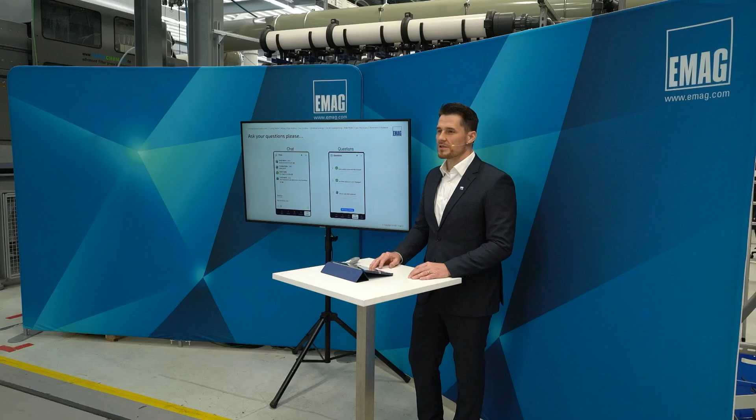You can see it, you can maybe also hear it. We are not sending out of the studio today, but we are sending from the EMAG Heubach plant. We are located about 60 kilometers east of Stuttgart and half an hour in the car from EMAG headquarters in Salach. Here in Heubach, we are the technology company within the EMAG group for ECM, meaning electrochemical machining, and what we will be talking about today, laser technologies, meaning EMAG LaserTec.

Today we will be talking about the following. First of all, we'll be giving an overview of the EMAG LaserTec machine portfolio and look in detail at the ELC6 machine. Then, since we are here live in the plant, we will talk about the newly designed setup of the Laser Application Center here and also give a live tour. And here we will also see some of the machines out of the machine portfolio in action.

When we then come back to the presentation, I will try to close the circle to show how we use the machines and the technologies, which we also see in the center, to produce and deliver full turnkey systems for our customers. The last topic will then be the laser hardening technology with the example of our ELC 1300 LH machine.

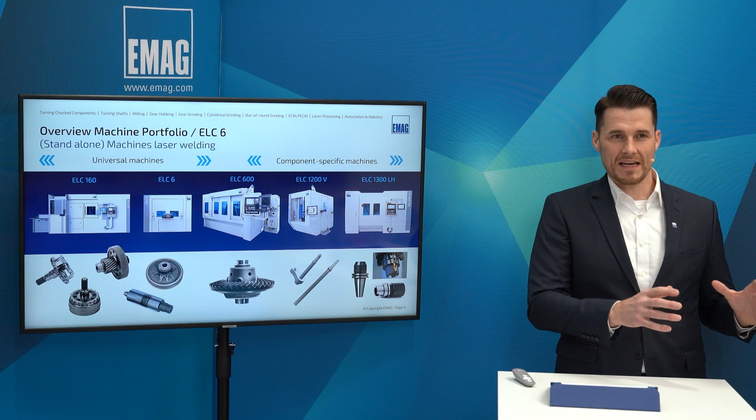The ELC 160. This is our most common machine. Almost 200 of these machines are producing parts around the globe. It was designed for a welding diameter of about 160 millimeters, but over the years that was more and more expanded. However, the name was established and stayed on. The machine is a linear design. There's a working spindle with a clamping device coming from the bottom, and that is moving through the stations linearly.

In 2018, we introduced the ELC6 to the market. The main difference, this machine is not a linear design, but it has a dial table for loading and unloading. That means, of course, that the load-unload can be done in parallel to the production time, and the cycle time will in that way be shorter. Now, this machine has, in the short time since it's been on the market, already become our most important machine, and this is why we will look at the machine in detail later. These two machines are used typically for passenger car powertrain components.

Now, the ELC 600 machine is right between universal and specific. The reason for this is it's a bigger machine, so the components are more or less out of the commercial vehicle powertrain spectrum. The machine itself is very flexible, so if the application is right, we can use this machine, of course, outside of these workpieces. But for now, it has mostly been used for truck differentials.

The ELC 1200V machine is also a dial table machine. We'll also see it in the Laser Application Center in a minute. This machine is also quite flexible. However, the main application so far has been welding of aluminum tubes to fittings, for example, in air conditioning of passenger cars.

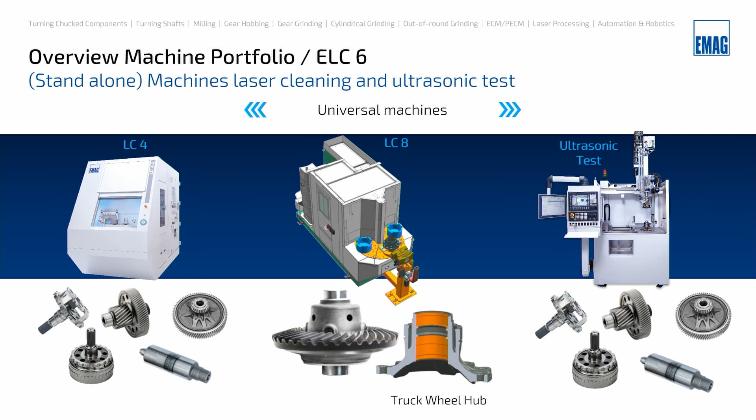Now, the LC4 by its size is, let's say, perfect for passenger car powertrain workpieces. The LC8 again is a bit bigger. This one will then be mostly used for commercial vehicle powertrain parts. And then we come to the ultrasonic test machine. This is then again for passenger car powertrain workpieces.

Now, this was a machine overview, and now we'll be looking in detail at the ELC6 machine. Again, the ELC6 machine has quickly developed to be our most important machine. We see here the two views. One is from the operator side, the other one is from the loading side. This version is in most cases used for automated loading, but it can also be delivered as a standalone version for manual loading, as shown here, then with a partial safety fence and a light curtain.

This is the machine design, the view now open from the operator side. So position 1, the loading area, is not visible. That's behind on the other side. But position 2, the swivel table, the dial table, brings the workpiece from the loading area into the weld station. Position 3 is then the working spindle coming from the bottom that clamps and locates the part and then brings it up to position 4, which is the counterbearing. The counterbearing holds the upper weld tooling. And the spindle, position 3, from the bottom brings the axial force into the workpiece.

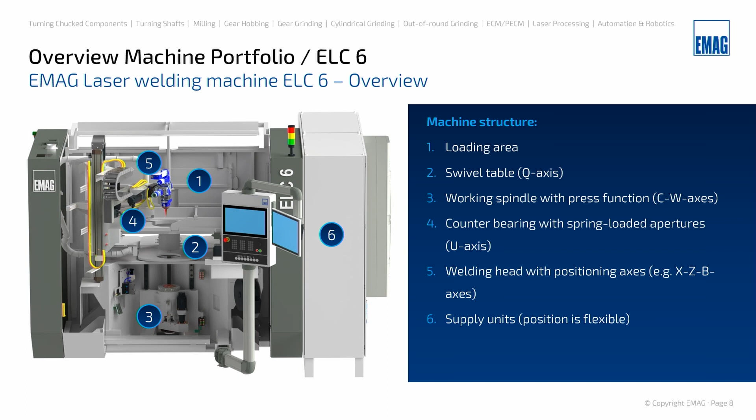Number 5 is the welding head. The welding head has certain positioning axes. For example, a horizontal, a vertical, and a swivel axis can be integrated, and that is what gives the machine its flexibility. Position 6 is then the supply units, for example, the electrical cabinet. The position of this is, of course, flexible wherever it is needed in the plant.

Yeah, the machine is fast, loading and unloading in parallel. It's flexible, different weld toolings can be installed, and the weld head is again mounted on different positioning axes. It is precise because in this machine, like in all our ELC machines, we use our own customized clamping devices. These are completely designed, manufactured, and assembled here in Heubach as well. So this is truly an EMAG product.

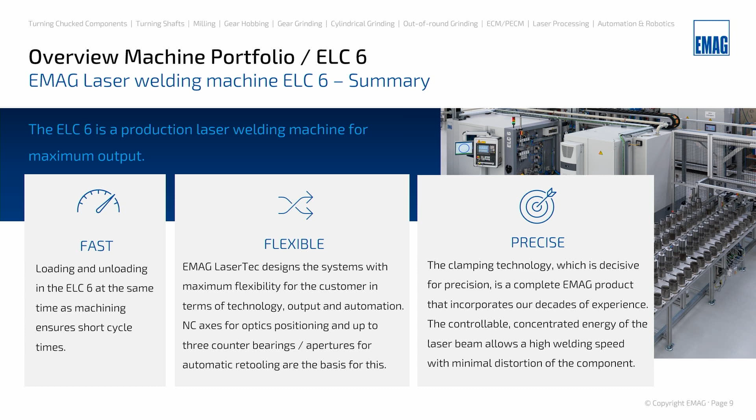The process safety comes from measures such as the active control of the welding position, or for example the use of state-of-the-art process monitoring systems like an LWM, a laser welding monitor. The machine also brings economical advantages. Why? Laser is of course a very efficient tool when it comes to energy input, and in the machine we are preferably using electric drives instead of pneumatic or hydraulic units. Last but not least, the machine was designed to be very compact with flexible positioning of the extra supply units so that we can find the best fit inside the customer plant.

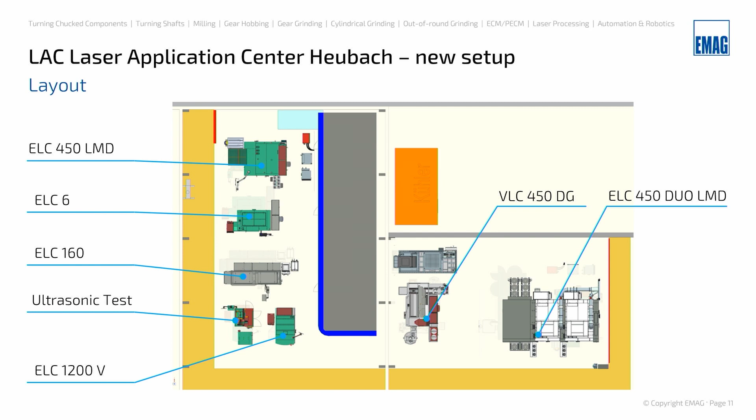The Laser Application Center. I am right now standing, let's say, in the middle of the Laser Application Center here in Heubach, and we wanted to use the chance to present it to you, give a live tour, and show the equipment and the expertise we have here. First up, to my right, there are machines from the upcoming brake disc coating technology, the ELC 450 Duo LMD for laser cladding, and the VLC 450 DG for grinding. And here I want to mention that around the middle of April, there will be a separate webinar for these technologies.

Then to my right, we see the machines, the ELC 1200V, an ELC 160, and also an ELC 6 machine. However, that just arrived a couple of weeks ago and is not completely set up yet. And we have the ultrasonic test. And now I want to use the chance and we start the tour.

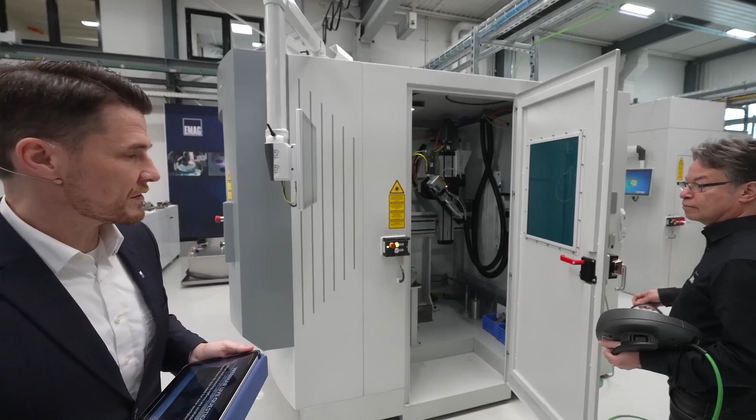First, we visit the ELC 1200V. As mentioned before, a dial table design, very quick cycle times. So the aluminum tubes we saw earlier, those reach a cycle time of 6 to 8 seconds. But again, the machine is very flexible, and that is also the reason why here in the lab we are right now using it even for the laser cleaning technology.

So what we have installed in the working area is the scanner head. This has a working area of 85 by 85 millimeters. You can also see the scanner head is mounted on 3 NC axes. So also here great flexibility. The laser source which we are using is an IPG 200 watt laser source with 1 millijoule of peak power.

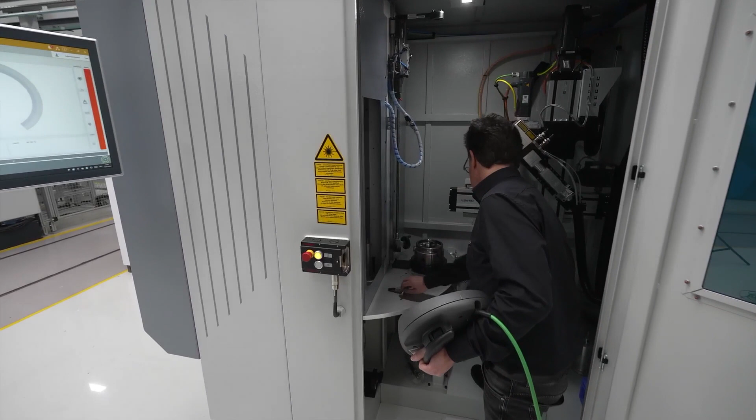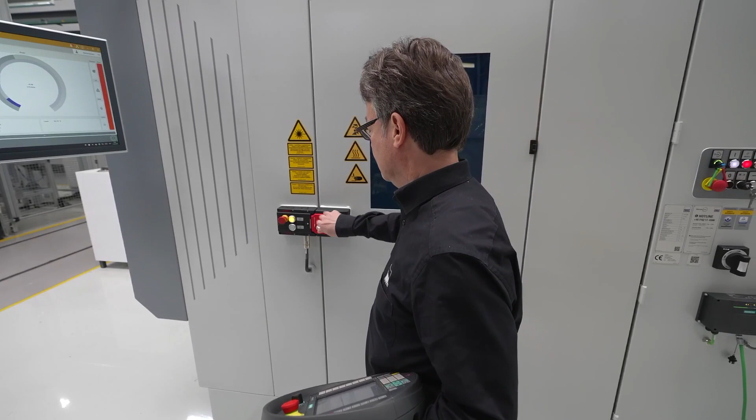And we can now show you a live example of a laser cleaning process. The total workpiece has been blacked with a black marker. And now we want to see how the laser removes the black paint. So first the cleaning head moves into position. The workpiece rotates, the power is on, and the paint is removed. Wow! Here we see the result now. On the left side it's been cleaned and the right side is still black.

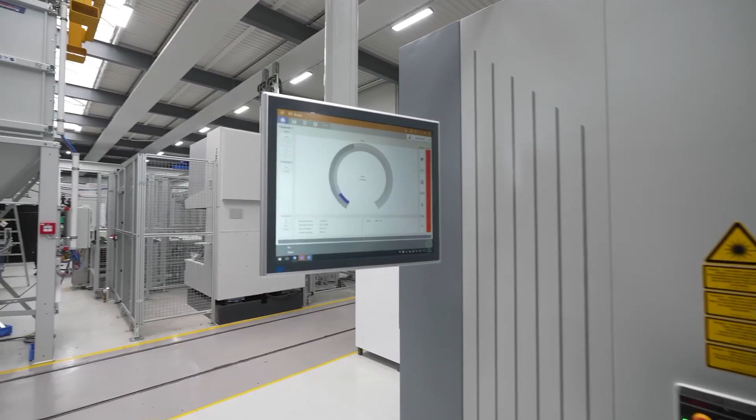Thank you, Siggy. And just to give a peek into the next chapter, we can see here the EC scan software which is used to control the process. I want to say here EC stands for EMAG controlled. So this is a software which is an EMAG product, so we developed it and we do the maintenance for it as well. So it is completely in our hand.

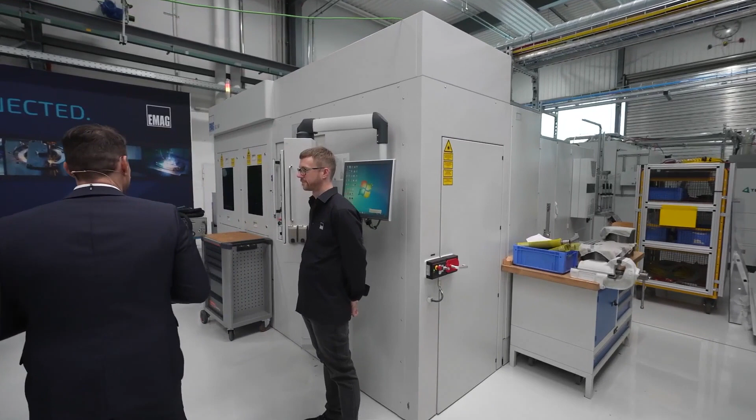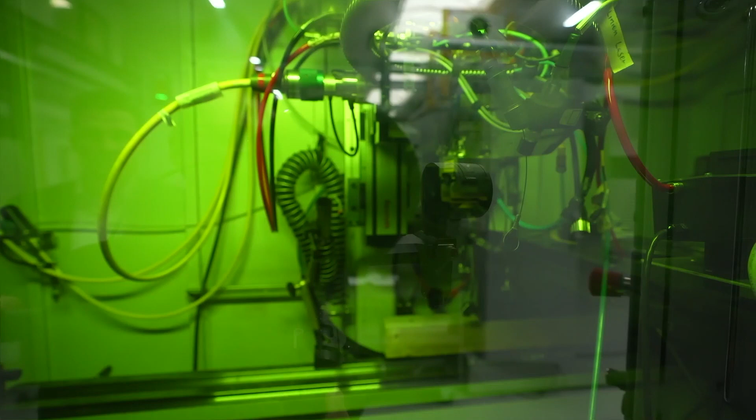Now we come to the ELC 160 machine. This machine in our lab is used for most welding tests. We see here the setup. It's a laser head with a 1:1.5 ratio. That means a fiber diameter of 200 microns will lead to a laser spot of 300 microns on the workpiece surface. And of course, we have the possibility to use different technologies, such as, for example, the bright line weld technology.

Right now installed on the other side of the machine is a different optic configuration. It's a scanner of the PFO type. PFO stands for Programmable Focusing Optics. And it is set up right now for a laser hardening process. And this we can also now demonstrate live. The workpiece is rotating.

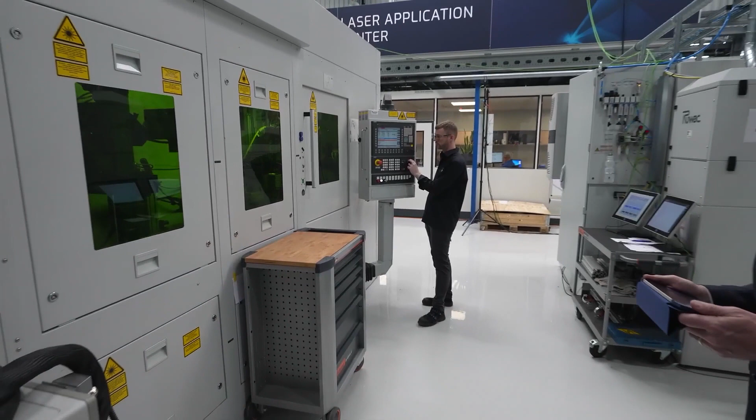The laser energy on the surface brings the material into the desired austenite structure. And then the material itself takes away the heat from the surface, and in that way quenches it and brings it to the intended martensite structure, which then gives the required hardness. So now we have just changed the surface and reached the required hardness.

Thank you, Stefan. In the meantime, I have received a question. This goes back to the laser cleaning. The question is, what is the effort of the retooling of cleaning machines? Keyword flexibility. So on the cleaning machines, we usually use some simple fixtures to position the parts. We have 2x2 fixtures, usually 2 on each side of the table, so each 180 degrees. And those are usually equipped with quick change interfaces. So it's a matter of a couple of minutes, maybe 5 minutes, to exchange those fixtures from, let's say, a shaft to a differential.

Then another question was, what about deep soiling or rust? Can this also be removed with laser? In general, yes. However, there will of course be a physical limit as to the depth of the rust which can be removed. If there's an application, we will gladly look at it in our lab. We have the equipment here and can easily run some tests.

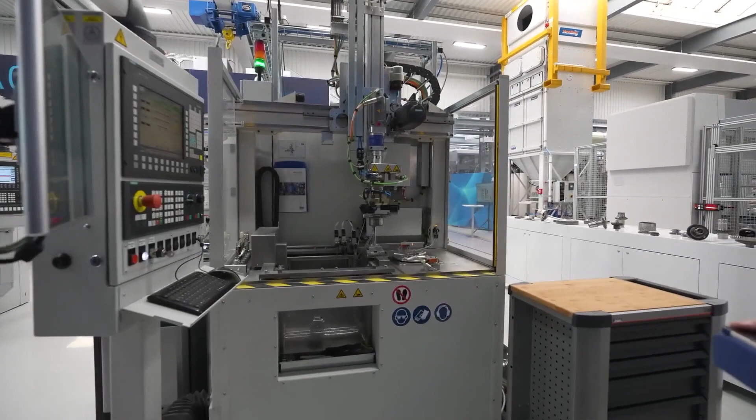Okay, so for laser welding, a typical process chain is laser cleaning, laser welding, and then the ultrasonic test, to have a non-destructive check if the weld is okay. And we see here the ultrasonic test machine setup. The part is rotating and the probe is in the middle inside the workpiece and fixed. The probe is actually inside a plastic nozzle to supply some water. Why? Because the ultrasonic test signal cannot travel through air. It needs to have either a solid material or a liquid. So between the sensor and the metal you need water.

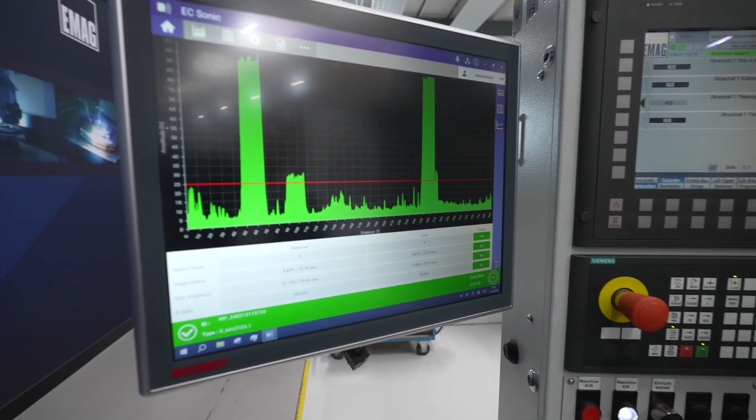So this check is being done, and the evaluation you will then see on the screen. I also mentioned here, it's the EC Sonic software. Same approach as for cleaning. EC is for EMAG controlled. This is our own software. Now you see a result.

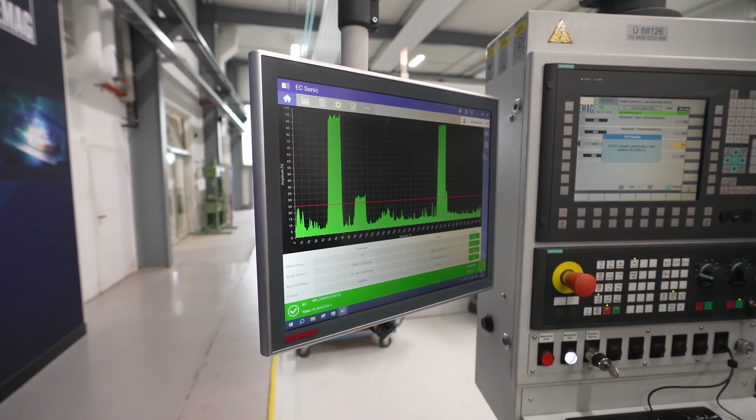The red line presents the limit from which a fault is defined. So everything above the red line is defined as a fault. In this case, 2 defects have been counted, 5 are the limit, the part is okay.

Single defect was maximum 5.87 allowed. We have just below, 5.84, so okay. And the sum of defects can be up to 17%. In this case, only 11, so okay rated.

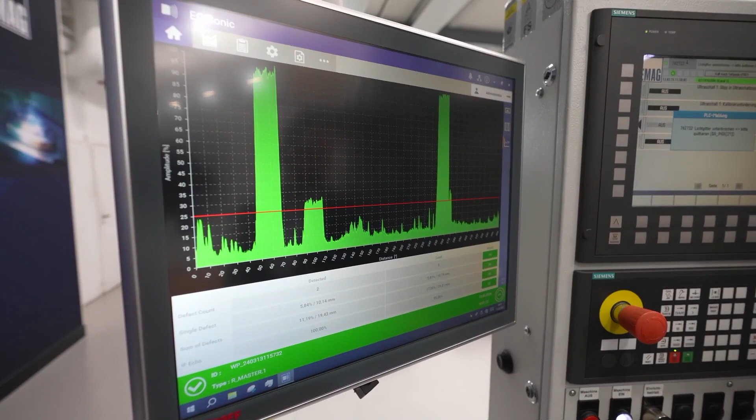Now we have a question coming back to laser hardening. What are the advantages of laser hardening? I will come back to this question later in the webinar, actually. Is induction hardening much faster and more flexible? Much faster, I would not say that it is. So if you want to harden a complete shaft over the complete length, probably induction hardening is faster and the more economic solution.

However, induction hardening is definitely not more flexible. Why? You need induction coils. Those are fixed. And with the laser, you are very flexible. You can move the laser beam wherever you need it and with the intensity that you need. So laser hardening is definitely more flexible.

And what hardening depth can be achieved? Everything between around 0.2 and 0.8 millimeters, or even up to over 1 millimeter can be achieved. However, we have to keep in mind that there are certain physical limits, but in general, up to 1 millimeter can be reached.

Okay, so now we have seen the non-destructive testing of a weld seam. However, if you want to be sure, at some point you also have to cut some parts and really look, let's say, inside the weld seam. This is what we do in our cutting, etching and microscoping laboratories. It's 2 rooms. This room here is used first of all for cutting, meaning cutting slices or segments out of the workpiece, of course across or through the weld area that you want to look at.

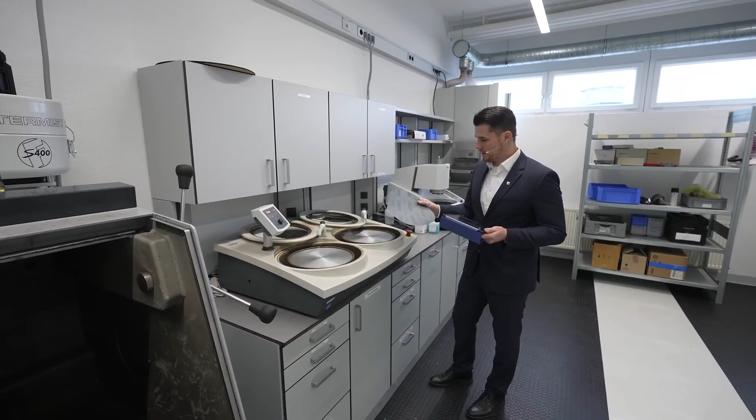Then we go to polishing, where different grades of grinding paper are used to polish the workpiece surface. And last but not least, we come to the etching that is needed to have clear visibility of the part later under the microscope. For example, Nital is used for usual steel, and etching according to Adler is used, for example, for stainless steel. So cut, polish, etch is here. Then we move over to the other room.

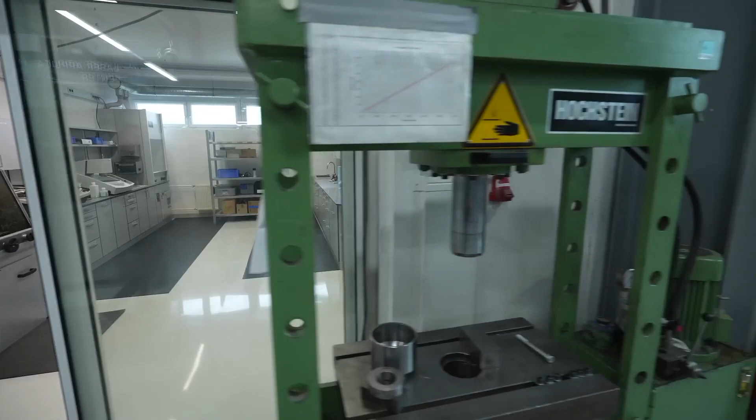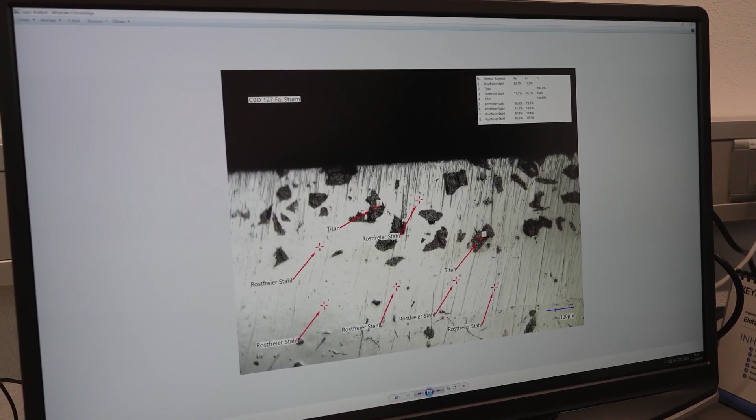Here are the microscopes and the hardness testers. First of all, we want to point out this is our newest microscope. It's really state-of-the-art, newest technology. It has a magnification of up to 2000. You can really look in detail at the microstructure and really analyze the material. In this case, it is a coating layer of laser cladding. And also it has a so-called LIBS function, which is a fluorescence method to analyze the material within a workpiece.

Of course, other more traditional microscopes are available for video analysis, or in this case, simple optical checks on a stereo microscope. Over to that side. In laser hardening or laser coating, which has the goal to give a hardened surface, we have to do the hardness check according to Vickers or Rockwell. But also when you have a weld seam, you make certain hardness measurements across the weld seam to check the hardness in the heat-affected zone. So this is being done here. And here's another simpler, more flexible hardness tester as well.

I have received another question. Let's step outside quickly. The question is: can the ultrasonic inspection be used for checking brake discs? For checking coatings, for example, brake disc coatings. Now, the method we are using, in general, I would say not.

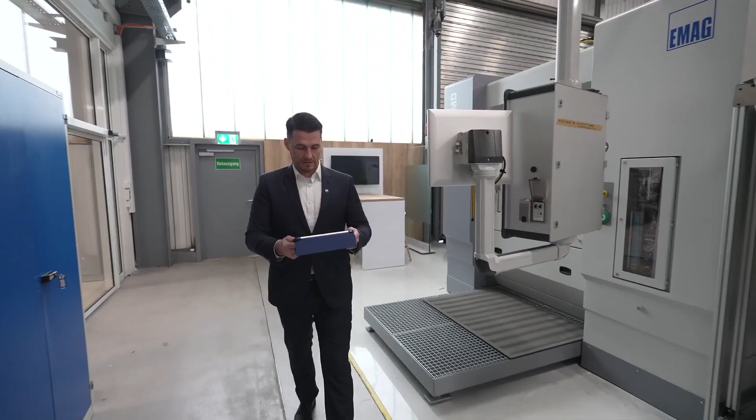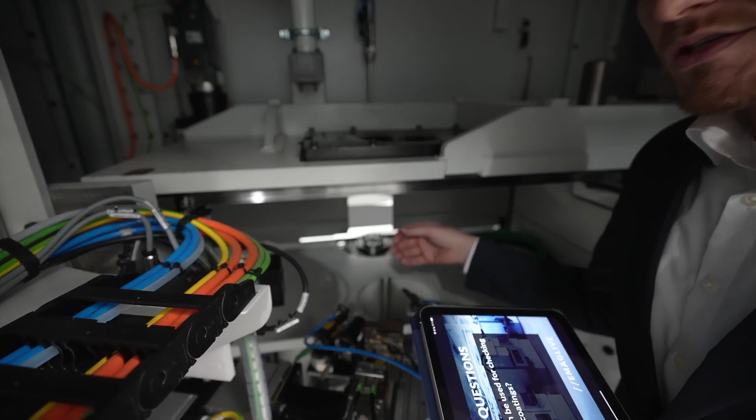Exactly, right. So let's move on quickly to the ELC6 machine. Like I said before, this is not up and running perfectly yet. However, I wanted to use the chance to show you. The machine has the best possible accessibility. I'm literally standing inside the machine, right where the process is. So maintenance activities, changeover or setup of new workpieces are very easy. The operators will be very happy.

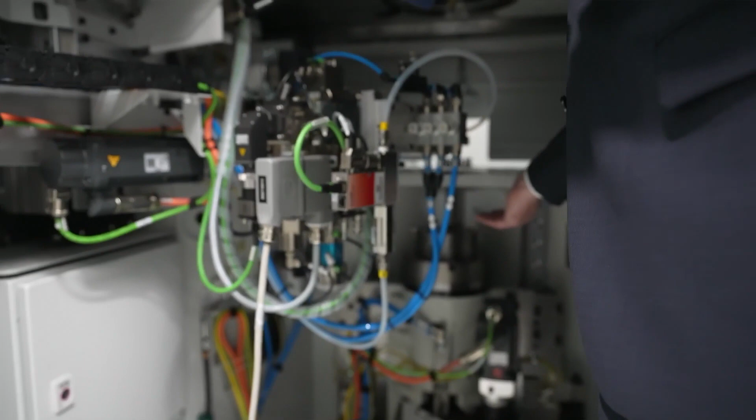And then we see the components which we mentioned before. On the bottom, of course, the working spindle with the clamping and locating, which brings the workpieces up to the counter bearings. We see the two different types that can be installed. So this would be workpiece group 1, this would be workpiece group 2, and we can do an automatic changeover. As you can see, that whole thing is a slide unit. So whatever tooling is needed at the moment is used.

And then we have here, for further flexibility, the weld head mounted on different axes. We see the vertical axis, the horizontal axis, and also the swivel axis right here, which gives the flexibility. Okay.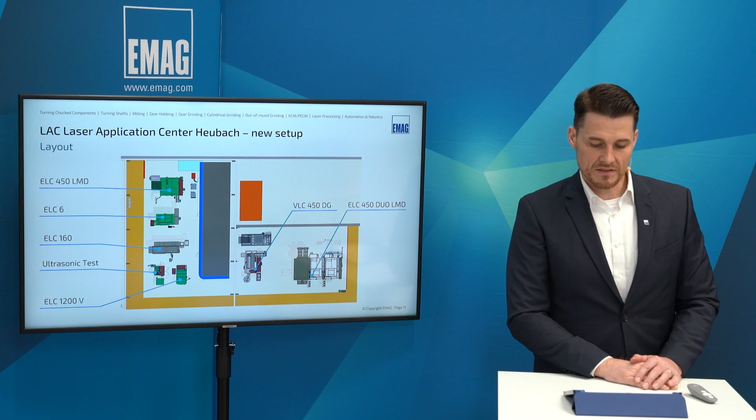In the meantime, another question came through regarding tests or prototyping we can do in the laboratory. How much effort is required for process reliability? And is this laboratory equipment necessary for every customer in order to achieve good welding results with laser welding? So, how much effort is required for process reliability? If a process has already been defined and developed by the customer, for example, and we only need to do process validation, that is a matter of only a few days. The lead time for that would be, depending on what tooling is required, 2, maybe up to 6 weeks beforehand.

However, if you intend to do a complete process development, that will take some more time. I would calculate with maybe 2 weeks as a rough value, and the lead time will then start at maybe 4 weeks and go up to 8. And then, is this laboratory equipment necessary for every customer in order to achieve good welding results with laser welding? Yes, at some point you have to do those cuts, you have to look in the microscope. So if you want to run a laser welding process, this is mandatory.

Okay. So now, summing up the tour of the Laser Application Center real quick, I want to point out that we have given it a new look, but that's not the main point here. The main point is, as you can see on all this equipment and all those machines, a lot of investment has been made in the last years, and we really have a lot of capability here to support the customer products. And for that, we have 8 highly qualified colleagues working in the department who will develop the processes, improve the processes, and most important, bring them to a point where they can be used for the customers in production.

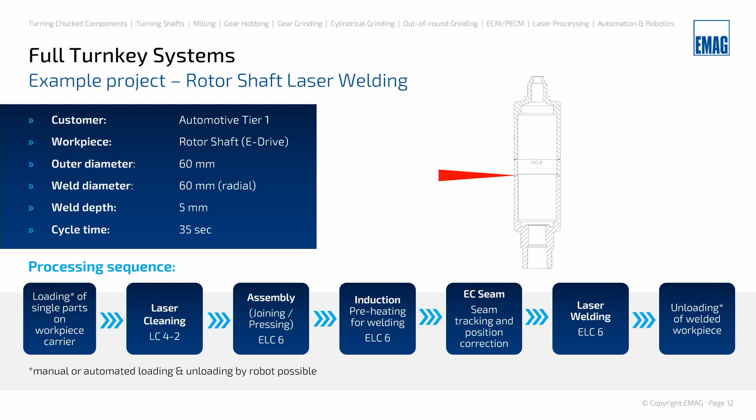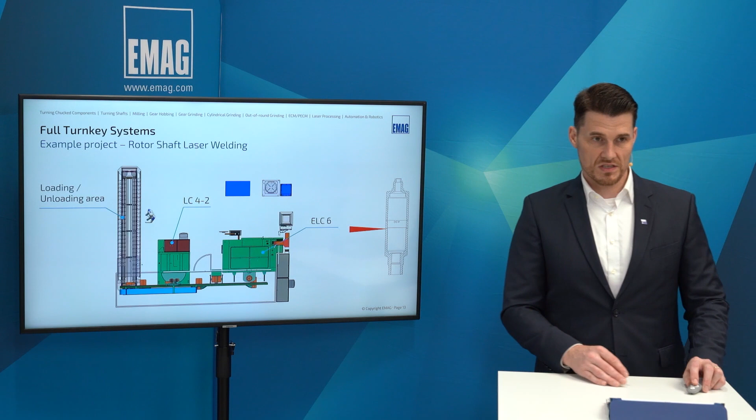On the bottom you see the process chain: first the laser cleaning in an LC4 machine, and then the ELC6 is used for assembly, induction preheating, seam tracking and position correction, and the laser welding. So all of this happens in the machine in this case. The system looks like this. We have load/unload on the left side, then the LC4 and the ELC6 machine. We bring in the parts, first laser cleaning, laser welding with all these sub-processes, and then back to the start.

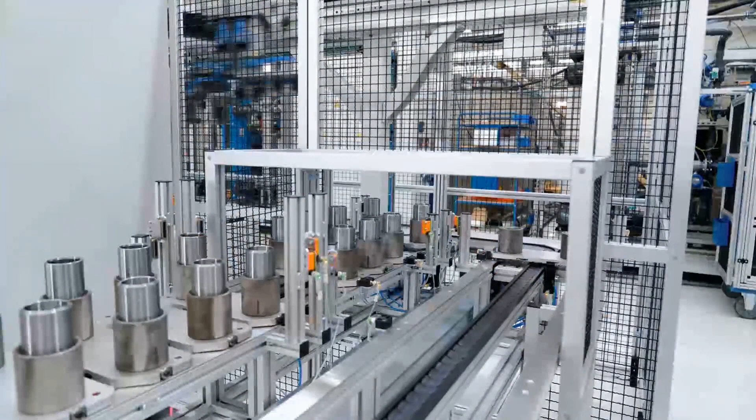For this we also have a short video. The two single components are on the left side, the finished welded part is on the right side. Single components are picked up and brought to the laser cleaning LC4. We go into the laser cleaning area. First up, the weld area of the first component, then over to the second component.

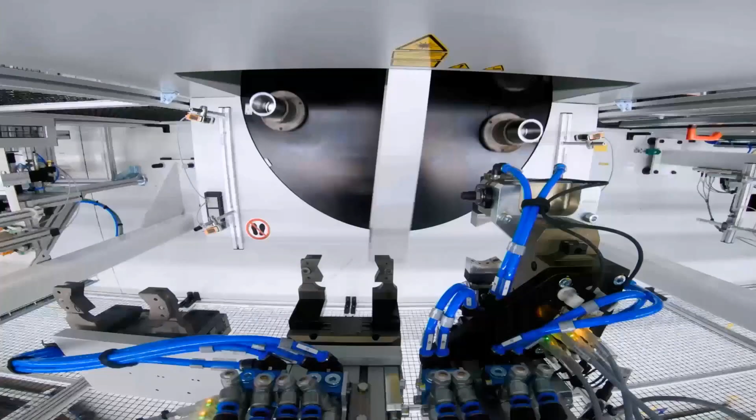Then out of the machine, and the gantry brings it to the ELC6. First off, the last welded part goes out and the single components come in. Of course, on the other side, a part is welded at the same time.

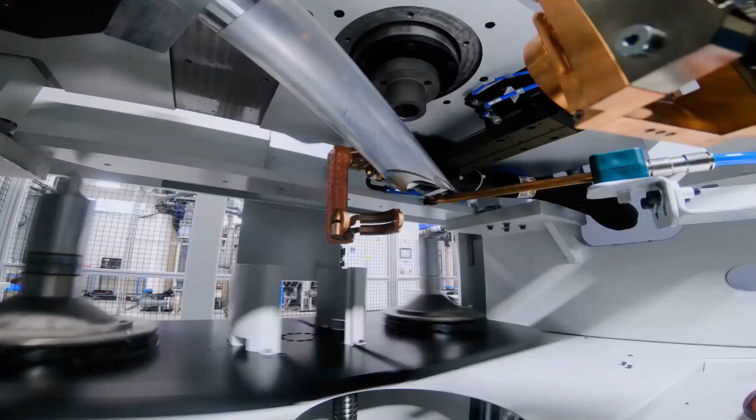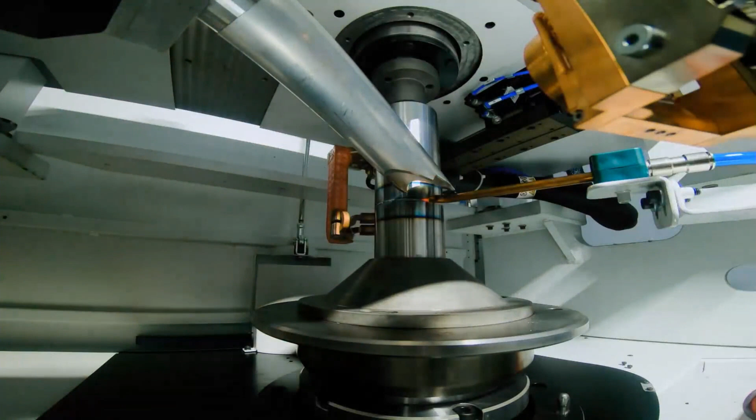So now it's very important to do a seam position control. We are using the EMAG EC Seam system to tell the weld head exactly what to do or how to position during the welding. Now it has been finished, and then the workpiece is unloaded. Of course, new components come in, and the finished part goes back to the pallet.

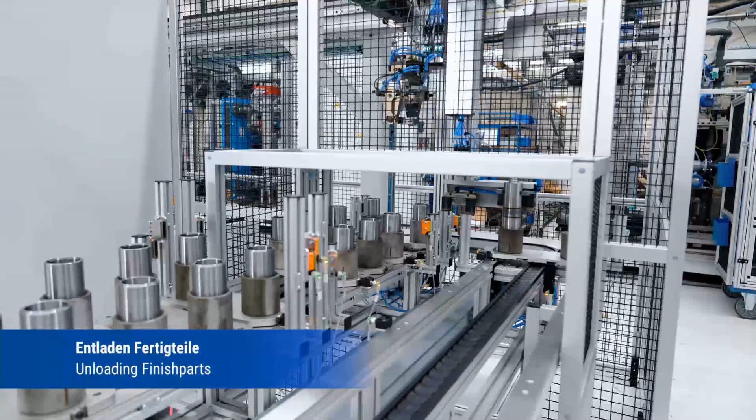Second example, this was a system which is used for two workpiece groups, differential and intermediate shafts. Both those components come also out of an electric drive of a passenger car. And this is usually the couple we see, intermediate shaft, differential. And we have a system which is able to weld both those parts with very, very little changeover.

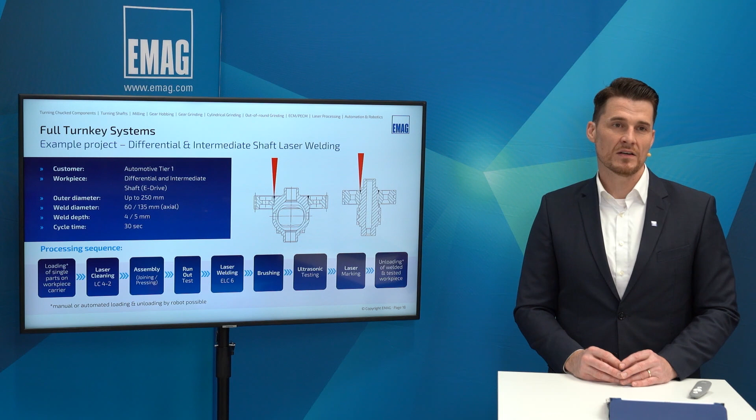We see here even more processes, laser cleaning, the joining outside of the machine. Then we have a run-out test, the laser welding in the ELC6. Then we brush the surface, go to the ultrasonic test, and if the part is okay, do the laser marking and then the unloading.

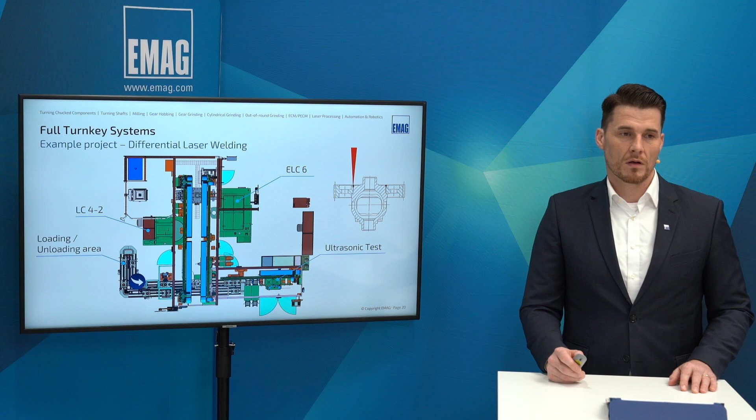So first of all, after load unload, we go to a DMC check. Then comes the laser cleaning, followed by the press process. We go up to the run-out test, then down to the ELC6 machine, where we do the welding. Then the brush station for the surface, ultrasonic test, and on an okay result, we go through laser marking and to the unloading.

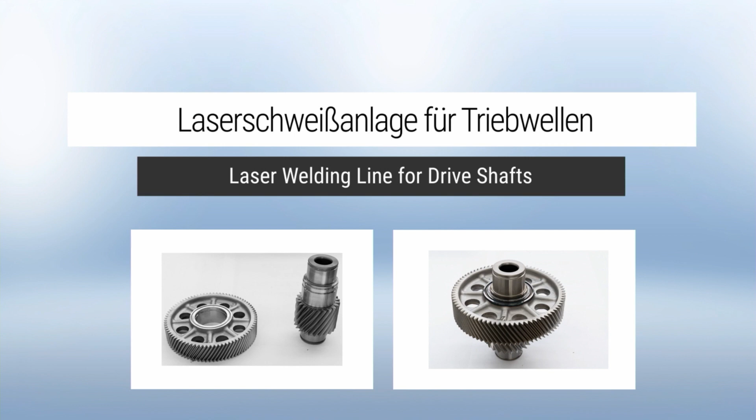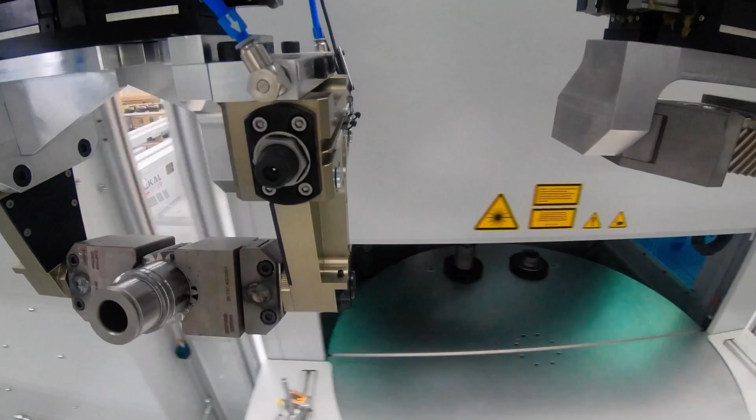For this we have a video of a very similar system. An intermediate shaft. Single components come in. The DMC is being checked. And now the parts are taken from the pallet and to the laser cleaning machine. Again, it's an LC4 design. And we do the laser cleaning.

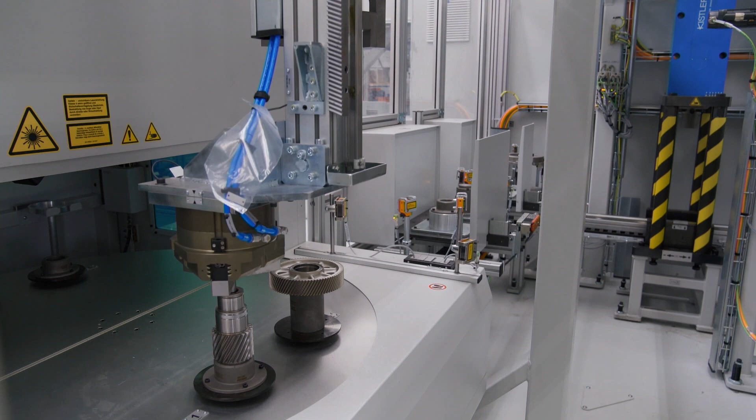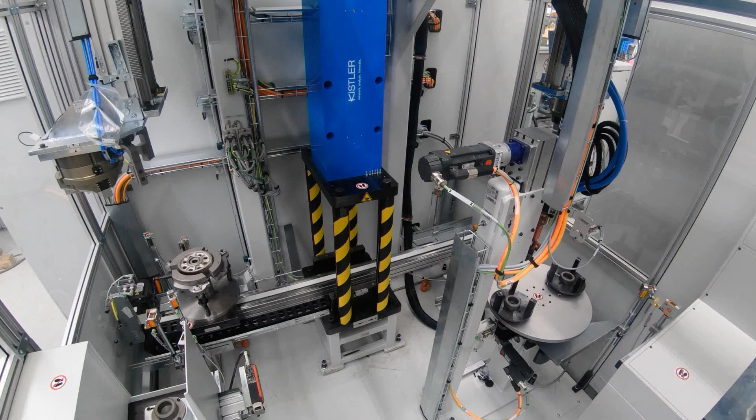So I have now received another question. Why do the parts still need to be cleaned before welding? They already come clean from pre-machining. That is not necessarily true, because from the pre-machining there might still be some residuals, for example, from coolants or other fluids on the part. And if you have those organic substances on the part, then that's a high risk for cracking of the weld seam later. So that is definitely recommended, and for example, in differential welding, 90% of inquiries have this specification that laser cleaning must be done.

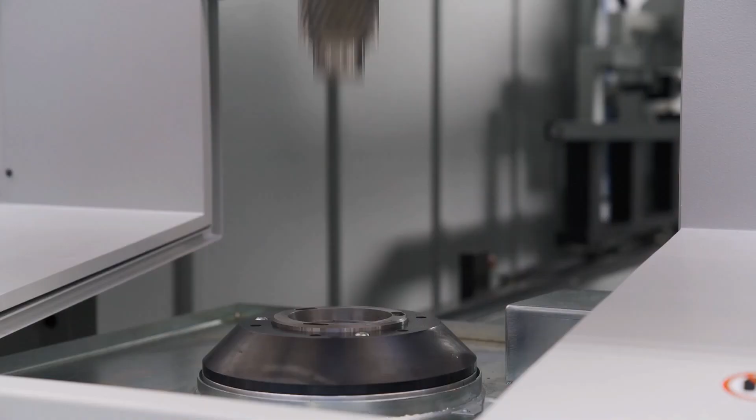Okay, the cleaned part has already been pressed together. Now, before the welding process, also here, because of the high carbon content, preheating of the weld area is being done. This is also to improve the weld quality and reduce the risk of cracking. The hot part then goes into the laser welder, in this case an ELC 160 machine. We see it on the linear slide.

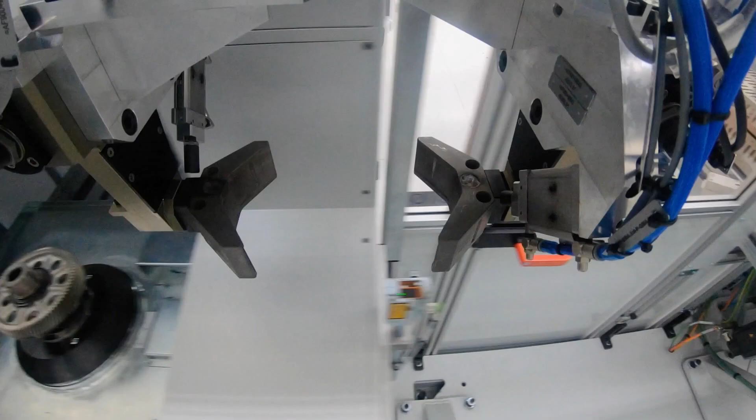The spindle brings the part into the upper weld tooling. You don't see much, and that is okay, because everything is covered. We have an inside and outside cover. Only the weld area is free. And on the lower right, you see the process monitoring with a laser welding monitor, LWM in this case. The welded part then is flipped over and goes to the brush. Part rotates and brush rotates.

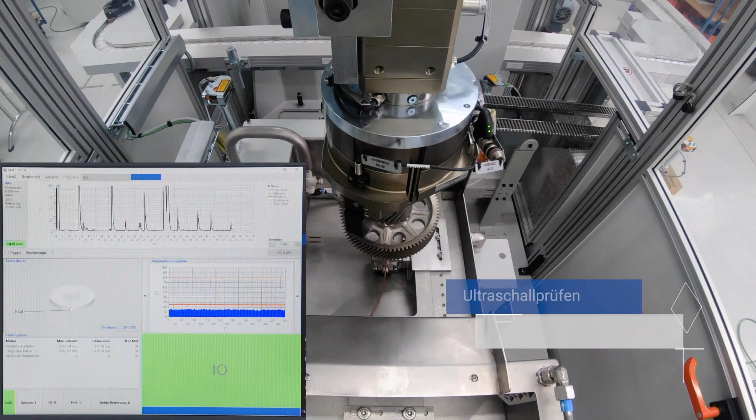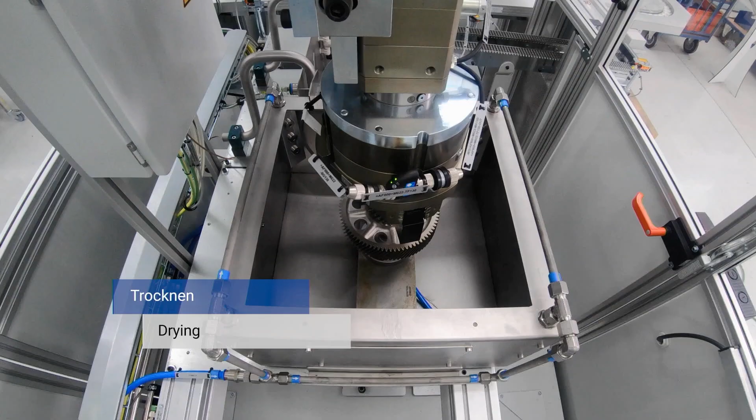Then we quickly go back onto the pallet and into the ultrasonic test station. So first the part is pressed down against the spring load to have it aligned correctly in the gripper, and then we do the ultrasonic test. Again, here the probe is inside the workpiece and the water is flowing, so this bit of water also needs to be dried off. This is done by rotating the part and in addition with some blow air. And then the finished part goes to the unloading area.

Okay, so now we have seen full turnkey systems. What makes EMAG LaserTech turnkey systems special? Simple, everything is delivered out of one hand. So the machine tools are of course our product, but also the custom clamping equipment and the automation is completely done by us. Everything from design, assembly, even manufacturing and up to startup, everything comes out of EMAG.

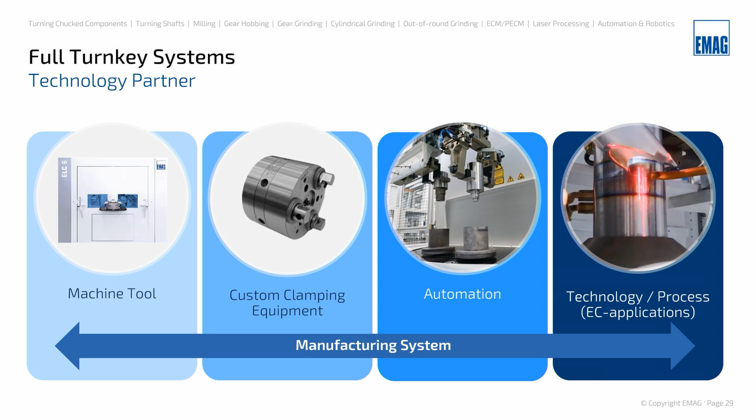And last but not least, to really make us here also a technology partner, the processes, which we saw first of all in the Laser Application Center, but also the supporting behind this, the EC application, the EMAG control application, which really make the software our product. And here is a list of these EC applications which really give the customer the benefit.

First off is EC Seam. In this case, we saw it earlier. Now we can look at it more in detail. A laser line is projected across the weld area. The camera which is located in the back of the weld head detects this laser line and also the gap where the laser line changes, and this is then the position that we need during the welding right after that.

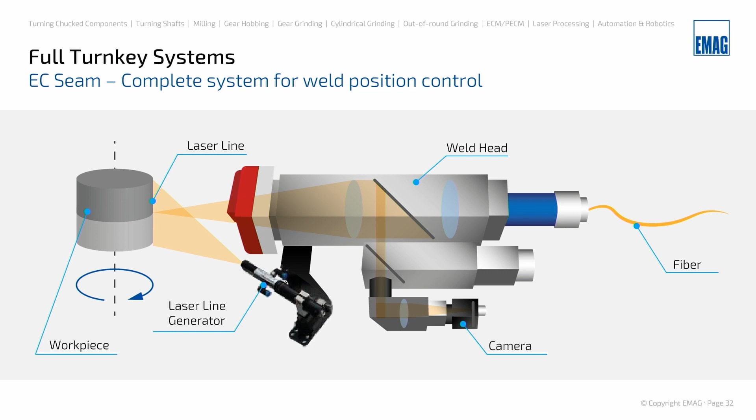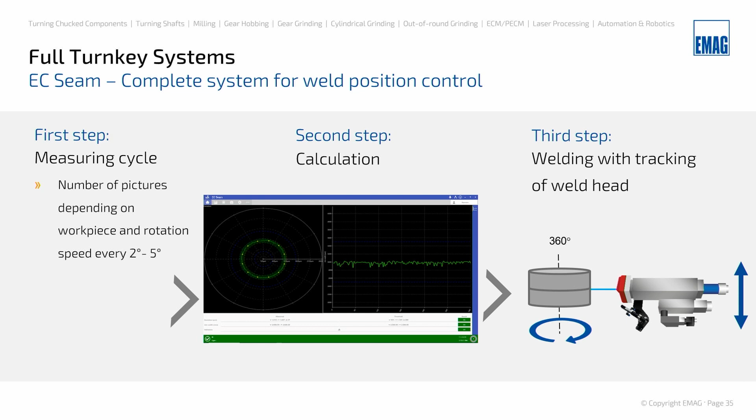There are two different possibilities. You can either use a complete control function where the weld head really follows the path during the rotation of the workpiece, or the other possibility is the seam position correction. So one correction value is chosen before the weld head moves to this and then stays fixed during the weld process. Both is easily possible.

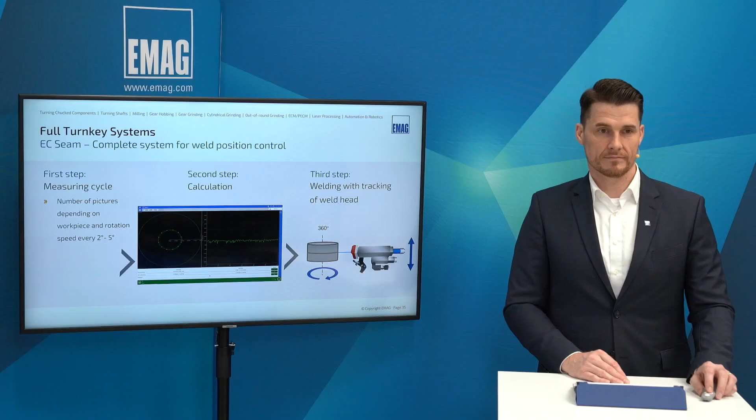The second application we already saw out in the center, ultrasonic testing, and the operating software for this is the EC Sonic. Again, completely our product, no third parties, no suppliers or sub-suppliers involved. What do we see here? The B-scan. The B-scan gives an indication of one track that has been measured by the ultrasonic test, and of course the colors give then an indication where on this track faults have been detected. Again, the faults are everything that is above the red line, which is the gate that needs to be defined during the process development.

And here you see in the amplitude chart, you also see the red line, the gate, and the peaks that are above it. And again, to view here a bit better on this chart, which we have chosen, 3 defects were over the red line. The limit is 5. The biggest single defect was 1.2%. 2% are allowed, and the sum of all detected defects is 2.3, and 5 is allowed. So 3 times okay result.

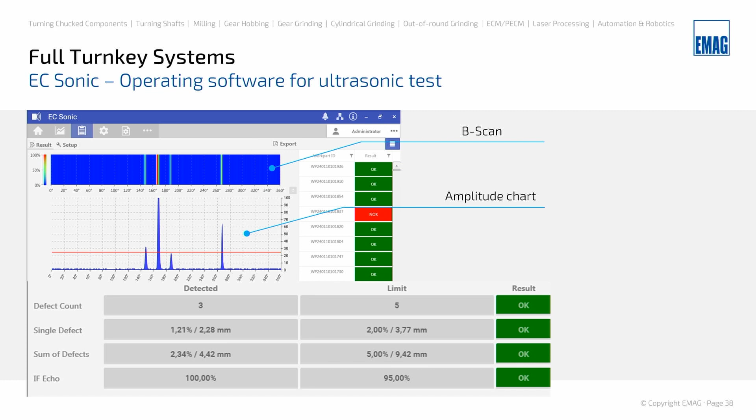And the good news is, with this software, it's easy to adjust these limits. For example, if you see we have to look closer at, for example, the single defects, or we have to look closer because we have this and that weld situation. We have to look closer at the total of the sum of all the defects. Then it can be easily adjusted in the software.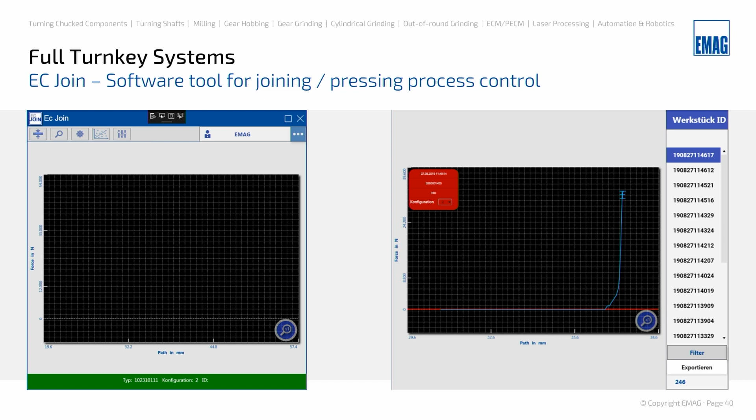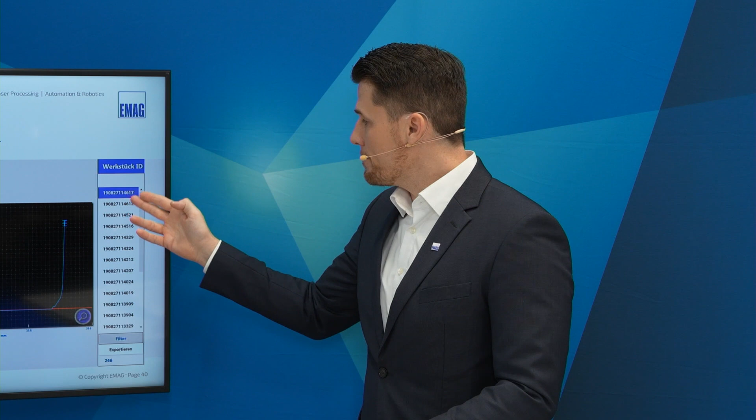Same goes for the EC Join, which is a software tool for press process control. Of course, in a press process, the force and the path need to be monitored, and then the real curve which occurs during the process is recorded, and this curve has to pass through a certain window, meaning a rectangular shape, in the chart in order to be rated OK. And why we have this display here is also to be shown. You see the workpiece IDs here, so you can store each curve, each process data in the control unit.

And to organize all this data, all this process data, the tool we use for that is our EC Data. Now this is first the process view in the EC Data software. Here you choose what process you are looking at. You see all the different workpieces, and then in the data display you see what position this part was welded in, for example, and what power was used.

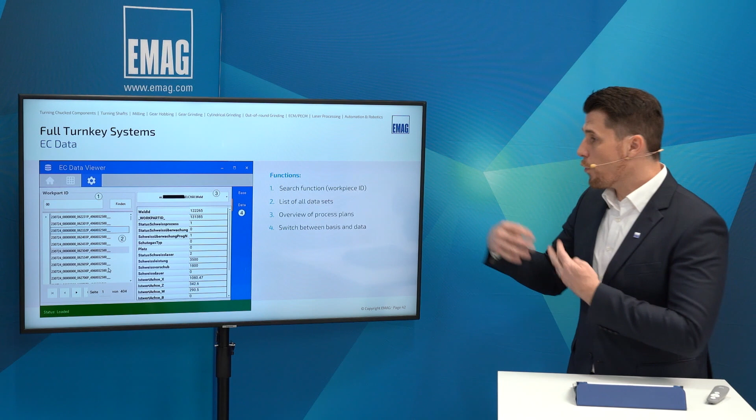And also available in EC Data is the workpiece view. Here your search function is after a workpiece, then you find a certain workpiece, you see an overview of all the process parameters, and for example you can also then switch between different process plans, meaning different batches or even different workpiece groups.

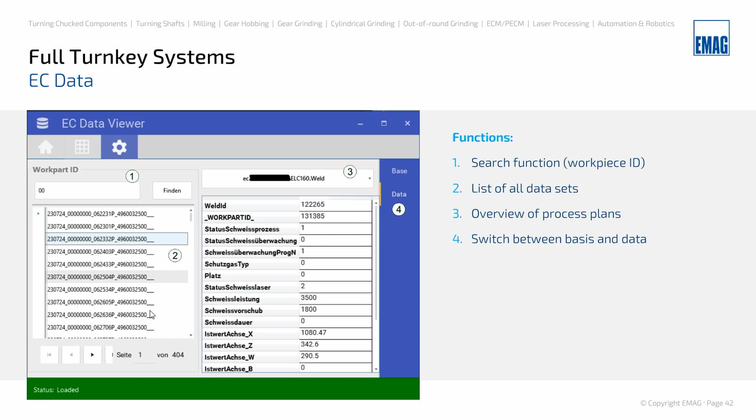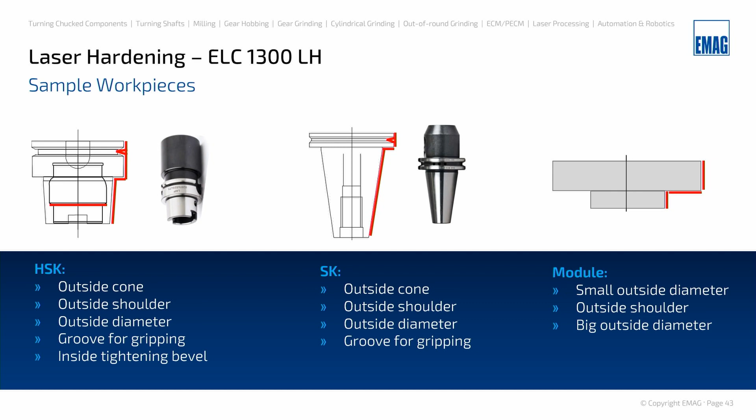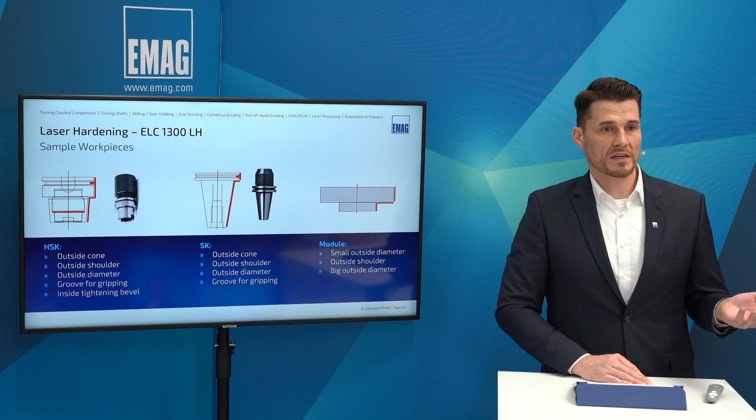Okay, now we want to give a closer look into the laser hardening technology. We see it here. We chose some sample workpieces to show it. It's a surface hardening technology, and it's very flexible. I mentioned this before. We can, for example, harden some inside shapes or some grooves like that. And if a workpiece changes, we don't have to do a changeover of an induction coil, we can just give the laser a new position.

The machine which we are using for this is the ELC 1300 LH machine, which is shown here. It was used for this example for those HSK tool holders. Hardening depth was between 0.6 and 0.7 millimeters. And you can see on the machine also here a huge front door, very well accessible. The operator is standing inside the machine literally.

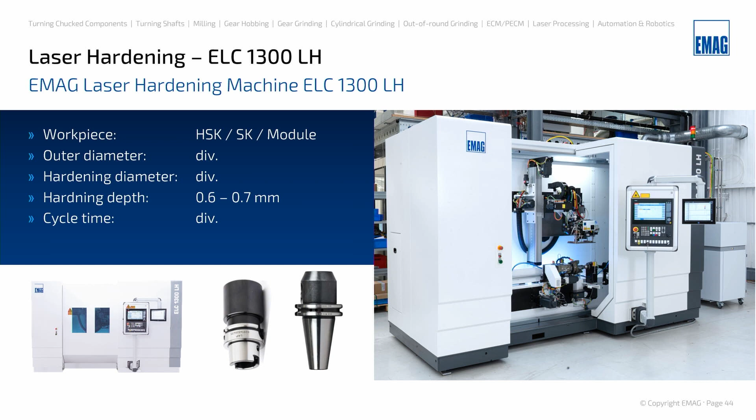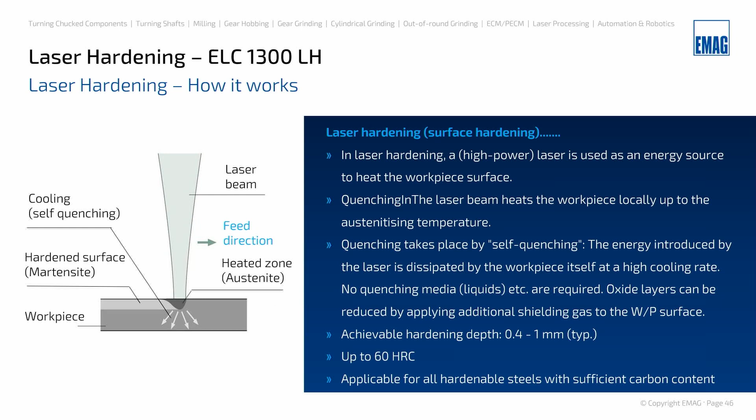Coming back quickly to the laser hardening process itself, what happens? Again, we move a laser beam across the workpiece surface. You see the feed direction here, and rectangular to the feed direction, the laser energy is scanned back and forth. That way a track of a width of 10 to 30 millimeters is being hardened. So the heat we put into the workpiece leads to the structure of the material changing to austenite. This is just like in the normal hardening process.

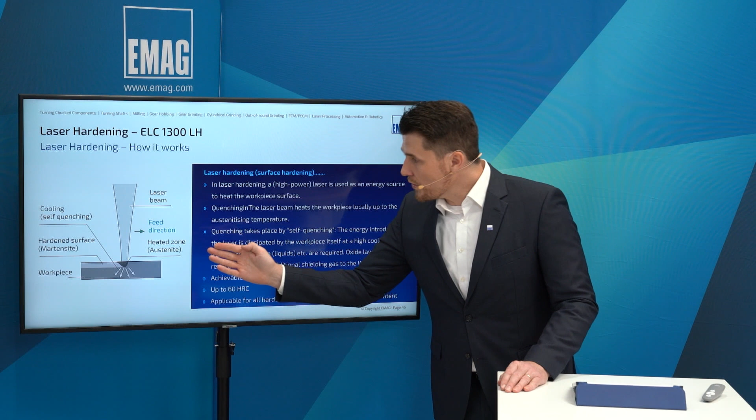Now what is different? The workpiece itself is cooling down, and that cooling is enough to do the quenching. So after this cooling down, you immediately reach the intended hardened surface, meaning a martensite structure. Typical values are, like we said earlier, 0.4 to 1 millimeter is possible maximum, and up to 60 Rockwell can be reached.

Okay, here's a question coming back to our easy seam, meaning our weld seam position control. Does it have a negative effect on the process time, or does the system run parallel to the main time? Now, the measuring run, meaning the first step which is being done, that has to be done before the weld. So that will take about 2-3 seconds depending on the workpiece diameter. However, the process itself then, meaning the tracking during the weld and also the calculation, that does not influence the cycle time.

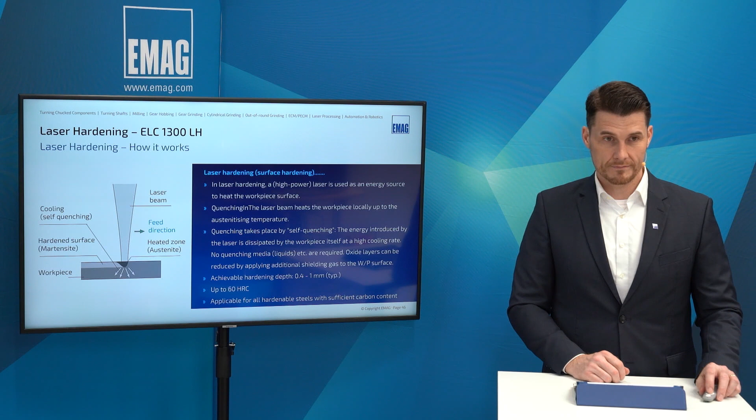And last but not least, the advantages of the hardening process. First of all, I want to say the material is self-quenching, so no cooling media is required. And that also means that the machine, for example, our laser hardening machine, can be integrated perfectly in a, let's say, normal production line. There is no salt bath or something like that, no additional medium. That is a perfect fit to a production line, and that means in most cases no separate discharge for the hardening process will be necessary.

And then, of course, it's a very precise input of the energy, only where it's needed. So very good economy. Then the quality, like I said before, thanks to the CNC technology and the laser scanner, it's very precise. The repeat accuracy is very good. And because of those reasons, of course, the distortion is low, so little to no rework will be necessary, and also the hardening stress, of course, is low.

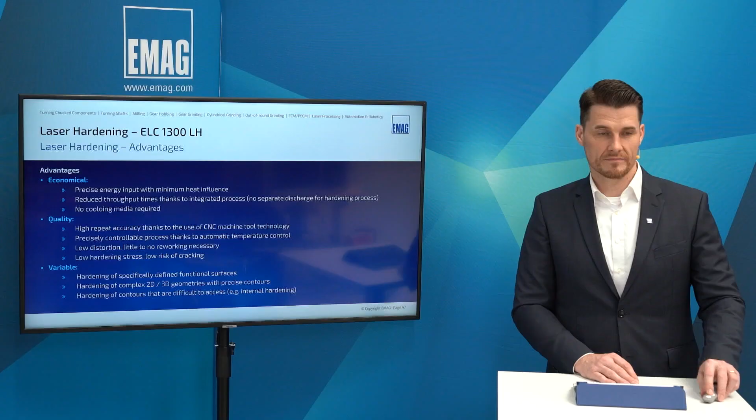So, a quick summary of what I talked about the last 45 minutes. First, we gave an overview of the machine portfolio, in special the ELC 6 machine. We saw then those machines in the laser application center. We saw the new setup, and we saw what makes the EMAG LaserTech turnkey systems special. Everything is out of one hand for the customer. There's one partner to talk to. We can go deep into the technologies if needed, and that is the true support and the true customer benefit. Last, we looked also at the laser hardening technology and what advantages it can bring.

Okay, so we hope we gave a good overview of the laser as a tool. We hope the questions were answered that you had.